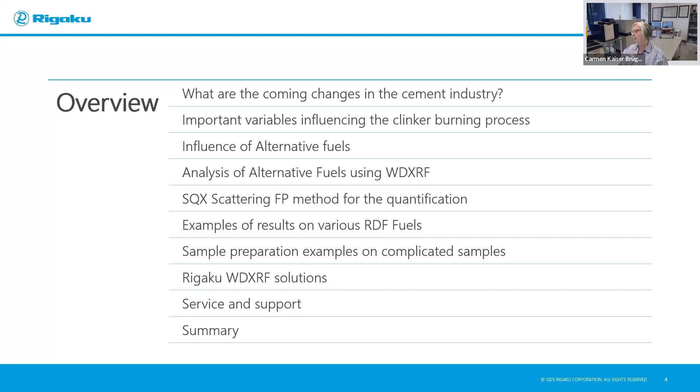So I will show you how to analyze these alternative fuels using wavelength-dispersive X-ray fluorescence. One of the methods we will show is how we can use a scattering FP method for the quantification, because it's complicated materials, a complicated matrix, and very heterogeneous. We will also look at how we can prepare the samples. Then lastly, we will end off with the Rigaku WDXRF solutions and how Rigaku can provide the service and support that's needed. And then we will summarize and conclude with a question and answer session.

Today I'm going to show you very unique XRF applications in the cement industry. Traditionally, an XRF spectrometer is used for quality control of all the raw materials we need to use in the process. As you can see in this diagram, the XRF is really used from mining, crushing, pre-blending, raw meal analysis, kiln feed analysis, clinker analysis for storage, cement grinding, and cement storage, packaging and distribution. So across this whole process we use the XRF spectrometer, but we are going to focus on the burning process - how we can use XRF to measure these alternative fuels.

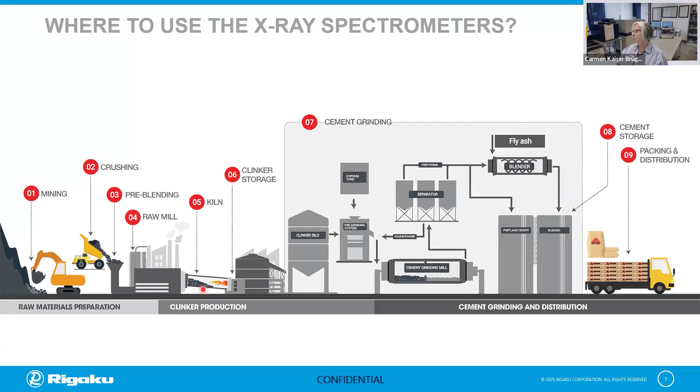So what are basically the coming changes in the cement industry? We need to ensure that we have a stronger requirement for better thermal and energy efficiency. Therefore, we try to use more alternative fuels, and we can increase clinker substitution. Very often there's a shortage of skilled personnel due to a variety of factors, and there's always a huge cost pressure in all parts of the process.

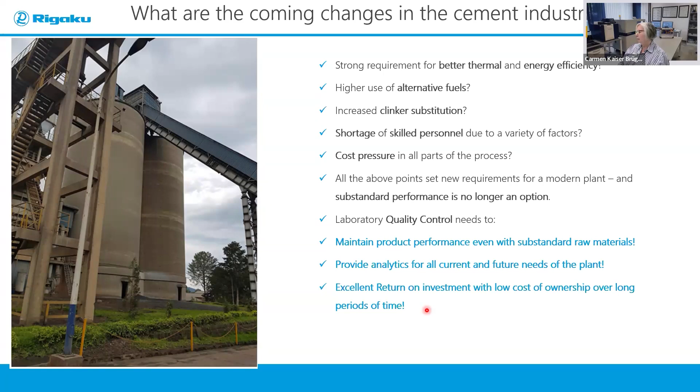All of these points are basically the new requirements that we need in a modern cement plant. Laboratory control needs to maintain performance even when we have difficult materials like alternative fuels. In the past, it was very easy to measure the standard materials, but now it's becoming increasingly difficult. We still need to provide excellent analytical results for the current and future plants. All of this will have an excellent return on investment, and we will have a lower cost of ownership over a very long period of time.

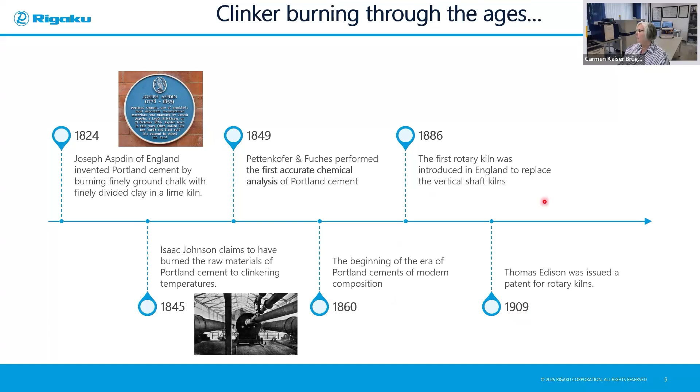In 1849, we did the first accurate chemical analysis of Portland cement by wet chemistry. Then, of course, in the 1860s, we began the era of Portland cement composition. In 1886, the first rotary kiln was produced and introduced in England to replace the vertical shaft. And then in 1909, we issued the patent for the rotary kiln. So it's a very long history of this clinker burning process.

A clinker composition consists of the main elements that we can see here. In the cement world, we call the calcium oxide with a C, the silicon dioxide with an S, the alumina with an A, and the F which is the ferrite. So we need these compositions in the clinker - these are the main elements.

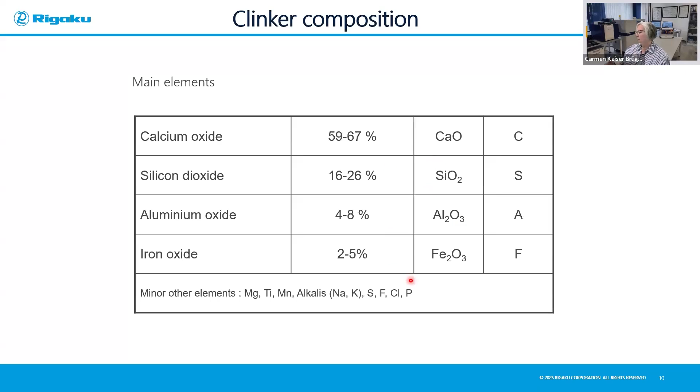If we look at the kiln, the geometry, the speed and the slope will influence this. The preheater and configuration will influence this. And the cooler characteristics will influence this. Of course, the raw materials - the mineralogical composition is important, the particle size distribution is important, the degree of calcination, and of course the thermal history.

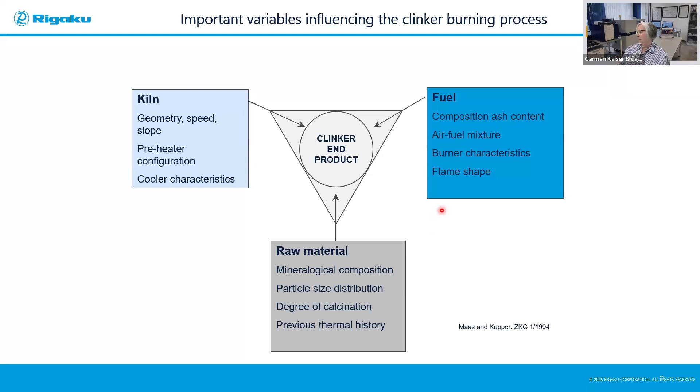So if we look now at the fuel, when we use the fuel in our kiln, as you saw in the process, we will have an ash, and this composition of the ash will add to the clinker. So it's a clinker ash pickup. This will influence the composition, and it will influence these phases that we have. The burning characteristics and the flame shape will also be influenced, and basically the air and fuel mixture will also be influenced.

If we look at the fuel ash, you can see that most kiln systems will almost have all the ash leave as part of the clinker. And the ash composition is very close to the clay because it has a high amount of silica, alumina, and calcium. So when firing low-grade coal, the LSF will have to be increased above 100.

And the coal that we use normally needs to be homogeneous to ensure a constant feed rate and a predictable mineral content. So elements like chlorine, sulfur, and alkali components - alkaline components like sodium and potassium are very important, and they will determine the burning technology. The content of the quartz will have wear and tear on the milling process at the end. So when we have the clinker and we need to mill it, it will have an effect.

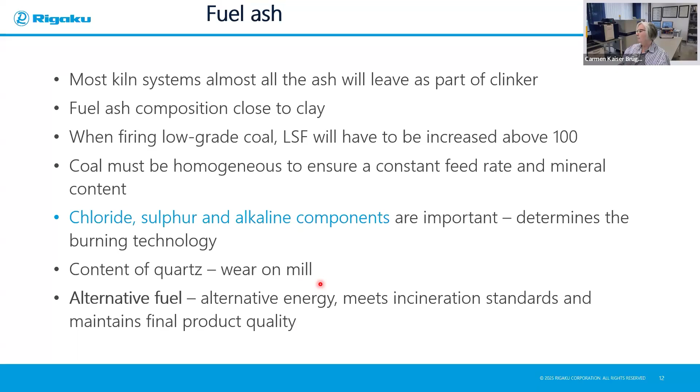So today we want to look at alternative fuels. This alternative energy that we use, other than what we have, which is the coal or the peat that we use, needs to meet the incineration standards used, and it needs to maintain the final product quality.

So if we look at the influence of minor elements - for example, if we have manganese, it can have an effect on the C4AF, which is the brownmillerite. Remember, the C is for calcium, A is for the aluminate, and F is for the ferrite. The titanium will also influence the brownmillerite.

Yes, the P2O5, which naturally occurs in limestone, can be beneficial and more detrimental to strength. Every 1% can decrease the C3S by 10%. So we have to control these minor elements very precisely.

And most importantly, the industrial waste has a lot of influence because heavy elements like vanadium and zinc, which are transition elements, or even lead, which is a heavier element, can influence these phases that we get in the clinker. For example, vanadium can influence the C2S. The vanadium can come from pet coke, for example, or any alternative coals that we use.

If we're burning tires, for example, the tires contain a lot of zinc, and the zinc can influence the C3S content. These will increase the reactivity of the clinker. And lead, of course, is very volatile at 750 degrees and will also influence the reactivity of the clinker.

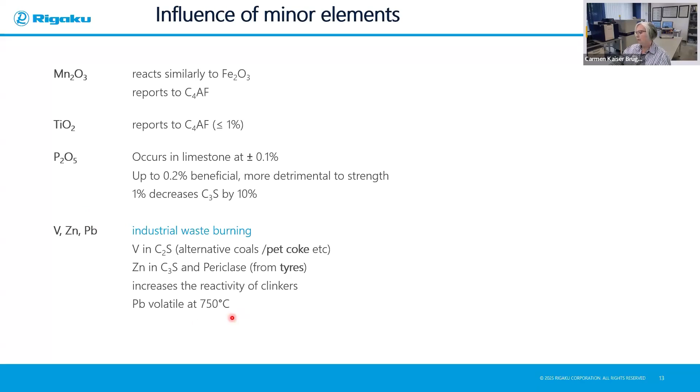So we need to really quantify the analytics of the alternative fuels. If you look at the alternative fuels, here we have a nice example of elephant grass. This has a very high biomass and can yield a lot of energy for the process.

Elephant grass is available in certain parts of the world, for example Rwanda. It's very fast growing and adaptable as a perennial grass, and can be used as a kiln source of combustion. Pyrolysis heats the grass in the absence of oxygen and can produce a bio-oil, a gas, or even a biochar, while direct combustion involves burning the grass directly for heat.

If you look at examples, an alternative fuel like elephant grass, when burned, will convert to ash, and this composition will have an influence. With other alternative fuels, elements like sulfur, chlorine and alkalis will have an influence, and can affect the refractory lining of the kiln, so we have to be careful and investigate this. We also have trace elements that can impact the process, like fan capacity, cement quality, or emissions.

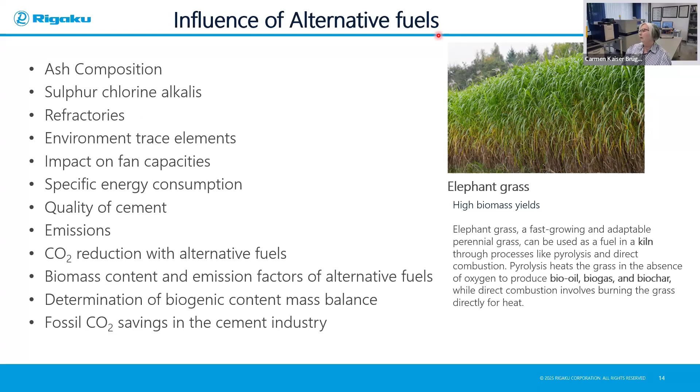The use of alternative fuels can greatly reduce CO2 emissions, so this is an important part. Biomass content and emission factors can influence this greatly. We can mitigate the use of fossil fuels like coal, saving a lot of costs, which has a cost implication.

Here we can see different categories of alternative fuels: liquid alternative fuels or solid alternative fuels. Liquids can be waste oils like solvents, animal fats, sewage and sludges. These are all in liquid form, or even in a suspension with solids. We need to measure these as well, by XRF, which is very easy.

Solid fuels can involve pet cokes, or even tires that can be fed into the process. We can even have animal meal or bone meal, or dried sewage sludges can be used. We can also use medical waste, but this is very tricky in terms of environmental impacts.

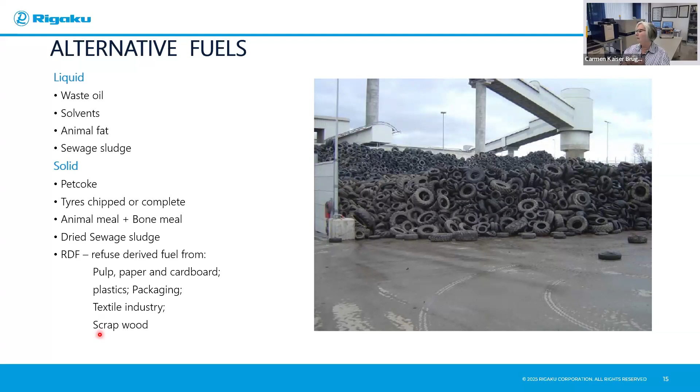If we look at refuse-derived fuels, called RDF, we can have paper and pulp and cardboard, things like plastics and packaging, or even wood, or textiles from industry. So any kind of alternative fuel can be used. This is very beneficial for the environment, because if we use these materials, we basically get rid of this waste in the kiln, which is very good for the environment.

Alternative fuels can be used not only in the cement industry, but also in coal-fired power plants. Tire-derived fuels can be anything from scrap tires or whole tires, and they are always mixed with coal or other fuels to dilute it, like with wood or chemical wastes, and can be fed into the kiln, coal power plants, or even paper mills.

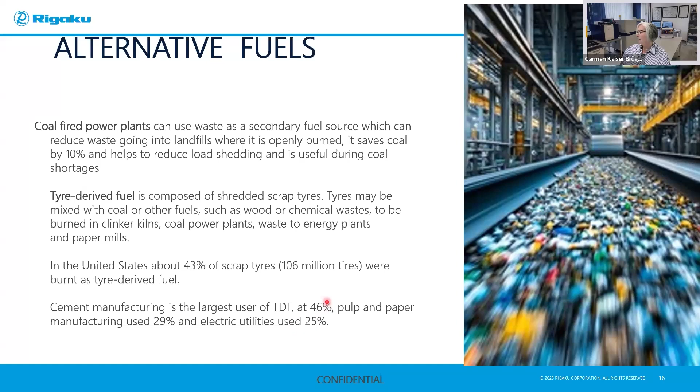In the cement industry, we use tire-derived fuels a lot. Paper and pulp use it around 29%, and electrical utilities use about 25%. So the cement industry is the highest user of tire-derived fuels.

Refuse-derived fuels, for example municipal waste like industrial or commercial waste, consist mainly of components like plastics and paper, recycled plastics, cardboards and wood. These are also used very often in these different industries.

Other materials such as glass and metals need to be removed. For example, if you have tires, you have metals, and they need to be removed. Here you can see on the conveyor it's fed into the process, and this needs to be removed, otherwise it could be detrimental to the kiln. So you remove them and sort them mechanically with special equipment.

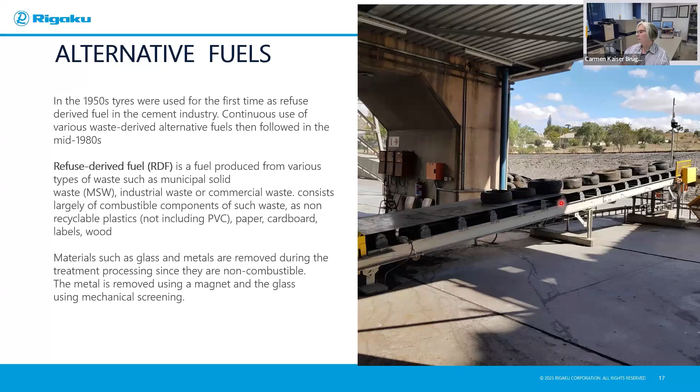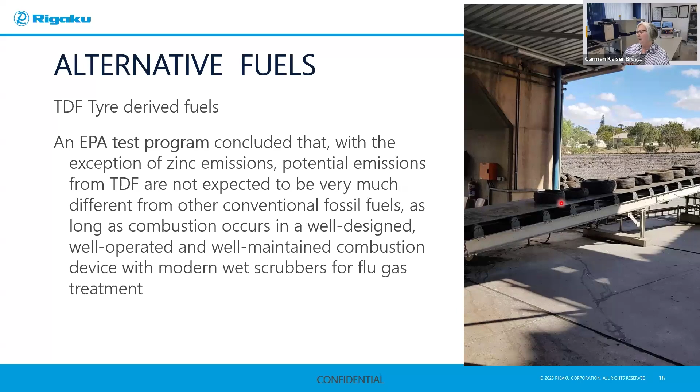So a lot of strategic planning and investigation needs to be done on the materials before they can be used in the process. As you can see, in the cement manufacturing process, our manufacturing process has to be optimized in the proper way for quality control.

We have the control parameters and the analytical solutions. In order to optimize the replacement of fossil fuels with alternative fuels, we need to investigate these materials very closely, and make sure that the alternative fuels do not have an impact on the reactivity of the clinker. So it's our way of driving the raw material and fuel.

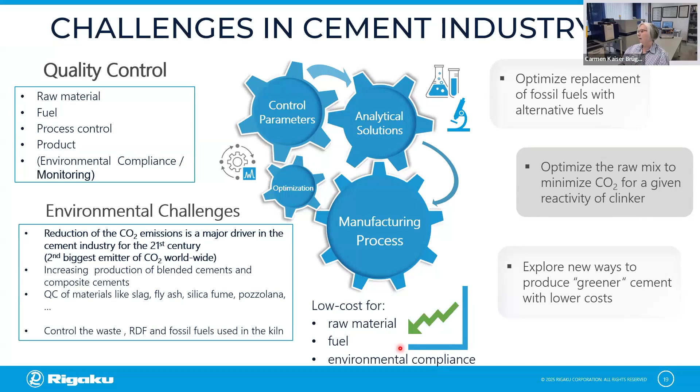The costs need to be driven down so that we have environmental compliance, and in this way we can produce a greener cement with a lower cost. So we need to control the waste and fossil fuels that we use in the kiln to reduce the CO2 emissions, which is the major driver in the cement industry in the 21st century.

So, of course, in order to reduce the clinker factor in cement for the benefit of hydraulic materials, we can use extenders like slag and pozzolana, and we can reduce the input of electrical energy by avoiding grinding the cement to a very low fineness, as required.

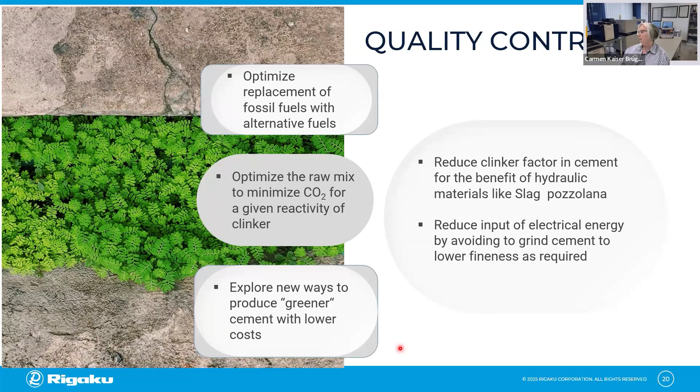So what about the toolbox? Our toolbox needs to involve analytical equipment that can help us investigate these materials. Here you can see we can use XRF, which is a main analytical tool to assure proper composition of our materials. Heavy metals and transition metals, due to alternative fuels, need to be tested, and the materials need to be tested at the correct detection limits. An XRF is an excellent tool for major, minor, and trace element detection.

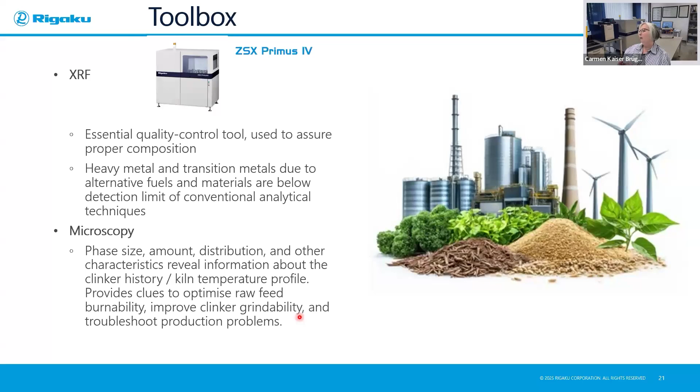Microscopy can be used as well, which is an old technique where we can look at the phase sizes, amount, distribution, and other characteristics that will reveal information about the clinker history and the kiln temperature profile. The clinker analysis done by microscopy will provide information about the raw material and burnability, to improve the clinker grindability, so that we can mitigate any problems that will occur in production.

We also have, for example, X-ray diffraction instruments that can be used for mineralogical composition of the clinker and any unknown materials that may cause problems in the process, like kiln buildups or ring cyclone chokes. These instruments are used very often in the cement industry.

Thermal analysis is a very well-known technique, also very useful because it can quantify organic emissions from the fuel we use and the secondary materials we use in the cement manufacturing process. We can also investigate cement sulfate forms and cement hydration products. These instruments are very useful for problem solving, if you have, for example, kiln buildups, finishing mill problems, or other operational problems.

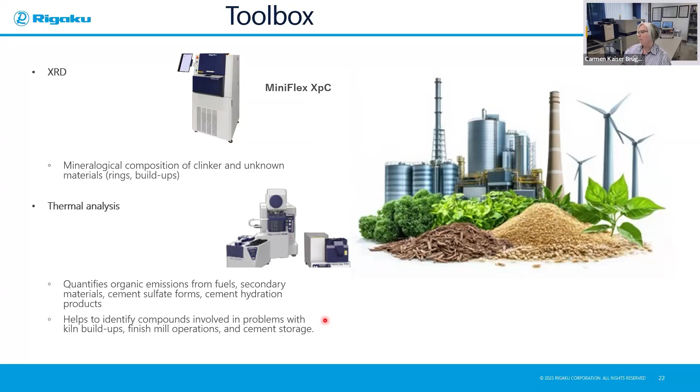So now I will focus on how we can measure alternative fuels using wavelength-dispersive XRF. These are our products at Rigaku, all sequential wavelength-dispersive instruments. We have the Primus series of instruments. We have the Simultix, which is the most powerful system, a simultaneous XRF instrument. And we have the benchtop instrument, the Supermini200.

In all the examples I am going to show you today, I will be using the Primus 4, which is our standard system. I will not talk too much about the instrument now because I want to focus more on the analysis and preparation of the alternative fuels.

But in short, the ZSX Primus 4 is our 4 kilowatt system, and the advantage of this instrument is that we have the X-ray tube above our sample. This is a very nice solution for the cement industry or other industrial customers where they work in very dusty environments and need to measure, for example, pressed powders.

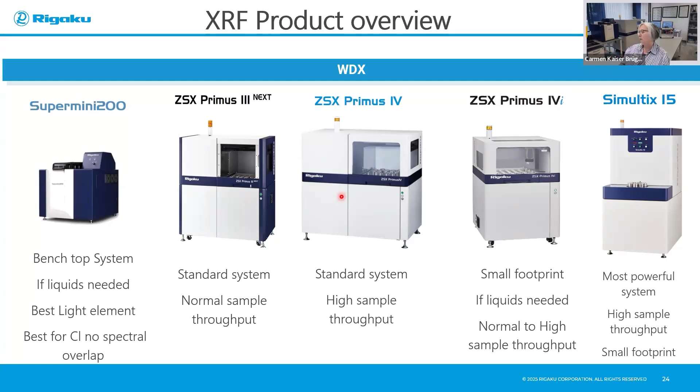which is the main method used for quality control. And of course the advantage of this is that we have the best sensitivity from having the X-ray tube above, very reproducible sample positioning, and most importantly, we do not have any contamination in our chamber due to an inferior sample being measured, maybe a broken pellet, because it will not fall on top of the X-ray tube, which is the most expensive part of your instrument.

So we can measure samples either semi-quantitatively or with a quantification method. The quantification method is very useful if you have calibration standards, and you can measure for quality control this way. But now we are using alternative fuels, and we want to look at the analytical results from alternative fuels, and this becomes very complicated because it's not easy to get analytical standards for the setup of a proper quantitative method. So therefore we use what we call semi-quantitative analysis.

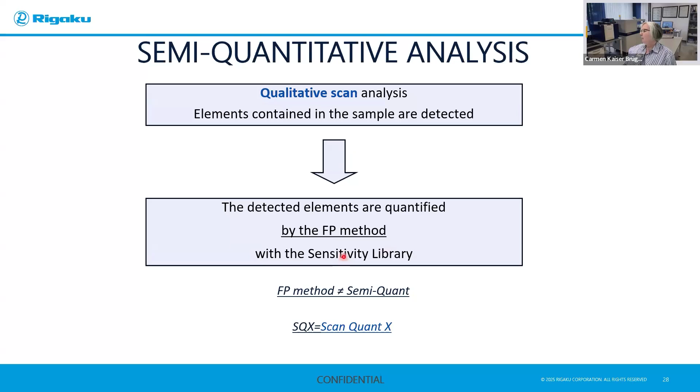Okay, so if we look now at semi-quantitative analysis in the Rigaku software, we call it SQX. Basically this analysis works as follows: we will prepare the sample, get a qualitative scan, and from the qualitative scan and detected elements, we will quantify this using a fundamental parameters method, which has been set up with a sensitivity library from the factory.

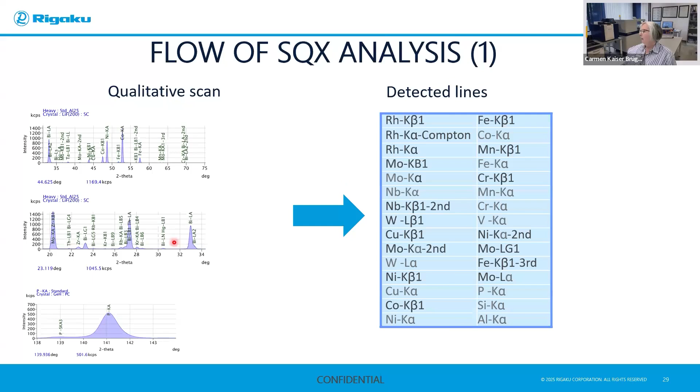So if you look now, this is an example of a semi-quantitative analysis. This is the example of a qualitative scan, and these are the detected lines. You can see we have L lines, we have K lines, we have alpha and beta lines. Once these lines have been identified with a clear peak, which is automatically done by the software, they will be measured for intensity. Each line will be measured with an intensity, and these intensities from the unknown sample will be used, along with the sensitivity library, to calculate using fundamental parameters what the concentrations of the elements will be. The sensitivities we obtain in this library are set up by the factory.

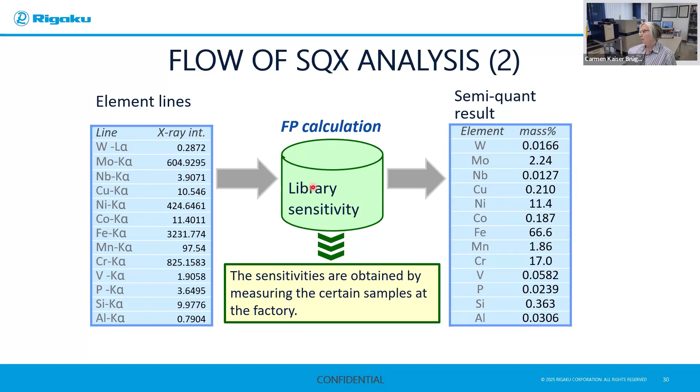Most importantly, I want to show you another method, called the scattering FP method. This is a very useful method in our software to measure alternative fuels. Why? Because alternative fuels are mainly organic. If you look at waste, like refuse-derived fuel, or tires, or municipal waste, or even the elephant grass that I showed you beforehand, these all have a very high organic component. So therefore, we use the scattering FP method.

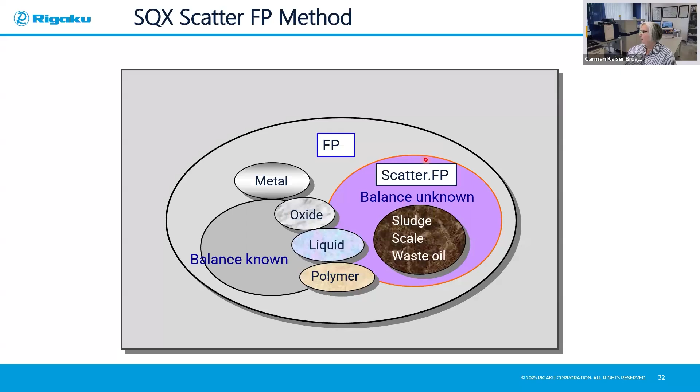So how does it work? This is a pool that you can see of different materials. We have metals and oxides, liquids and polymers, sludges, scales, waste oils. And of course, the semi-quantitative method uses the fundamental parameters method. But if we want to measure these materials, it is easier to use the scattering FP if we have a very high carbon, hydrogen, oxygen, nitrogen component, which is organic. So therefore, we can measure the balance of these materials very successfully using the Compton line. It's called a scattering FP method.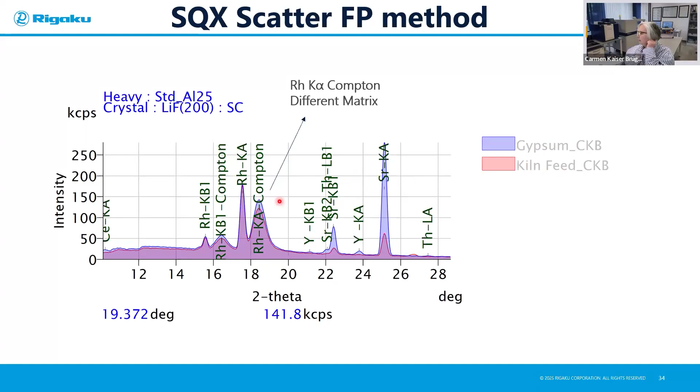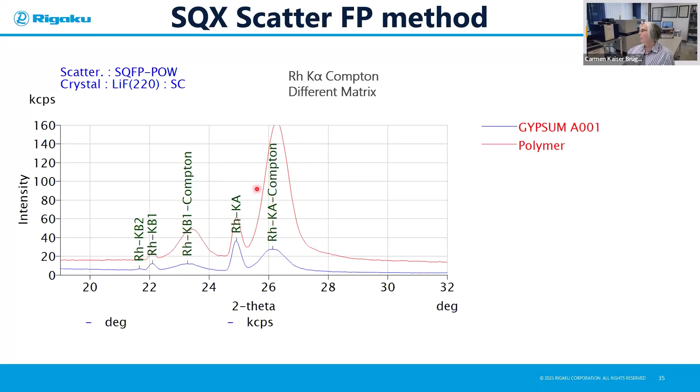Here we have another example where we overlaid the Compton line with a polymer and a gypsum. The polymer has a very, very high organic part of the matrix, so therefore we have a much higher Compton line, more intense. Our scattering FP, as you can see, which is an optional part in the software, is very useful for the analysis of materials like rocks, limestones and plastics, because this will have an influence from the hydrogen, carbon, oxygen, nitrogen portion of the material.

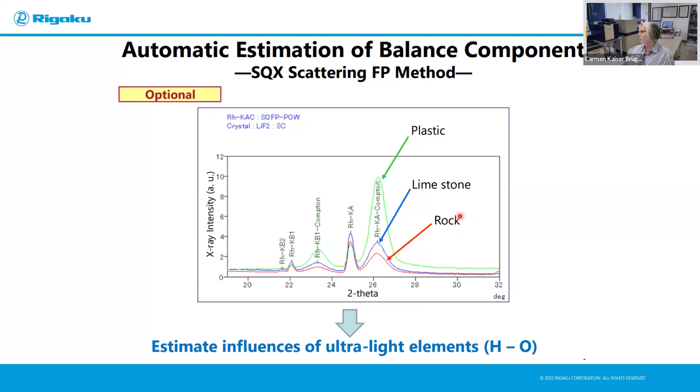So if we look now at the analysis of a tire, this is an example of a tire that's been shredded and cut, and we can see we have a very heterogeneous sample. How do we make the heterogeneous sample into a homogeneous sample? Well, there are different types of equipment available to mill the sample using cryogenic milling, and this is exactly what we've done here. We've shredded this and gone to another step, which involves cryogenic milling. We make the material hard and brittle by treating it with liquid nitrogen, and we are able to produce this kind of sample, which still looks heterogeneous, but is completely pulverized.

Now we can comfortably make what we call a pressed powder from this. Of course, the pressed powder needs to have a defined density, so we need an infinitely thick sample to be able to measure all the elements you see here. In this example, the carbon portion was measured using the fundamental parameters scattering FP method. This means we measured the Compton line to get the balance of the material, which is from a sample A and B. We measured it twice and prepared it twice. You can see there are differences because it's heterogeneous.

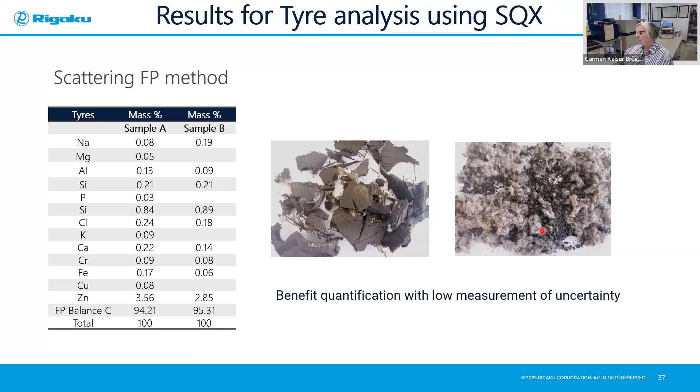How else can we measure alternative fuels? Here you can see a lot of waste. On the plant, we have a process instrument that can shred the material. After shredding, you can see a big pile of waste with different colors.

Sampling is very difficult here for the laboratory, but this is not about sampling - we could do another topic for that. Of course, trying to get a good sample here is a challenge. Once we have obtained a good representative sample from this, we can then make an analysis in the laboratory.

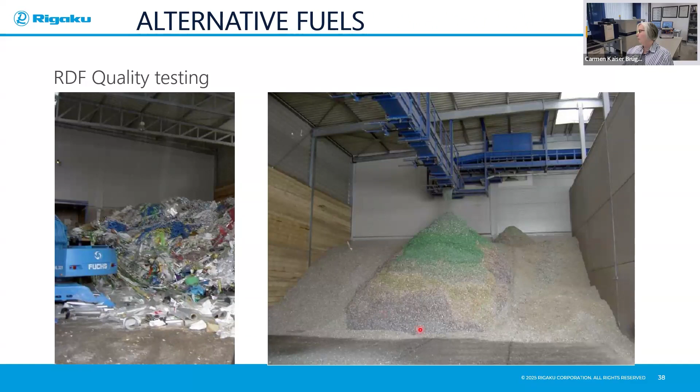From this pile, we took 5 different large samples, because it's a big stockpile. The large samples were treated in the same way as I described before, and we prepared the sample 5 times. As you can see, it's a very heterogeneous sample.

Using the scattering FP method again to estimate the balance of the material, we have defined the balance here. So the more consistent the definition of the balance, the more consistent the analysis of your results will be. This result was done on our smaller instrument, the Super Mini 200 with a palladium source.

The biggest advantage of the Super Mini in this case is the determination of chloride. Why? Because we have a very good peak to background ratio, since we have no spectral overlap from the rhodium tube, which we conventionally get on our bigger floor-standing instrument.

You can see here at the bottom we also determined chlorine, but with a rhodium target. Of course, the drawback is we don't get a really nice peak to background ratio in this spectra that you see. So just highlighting that a Super Mini can also be very useful, especially for the analysis of chlorine.

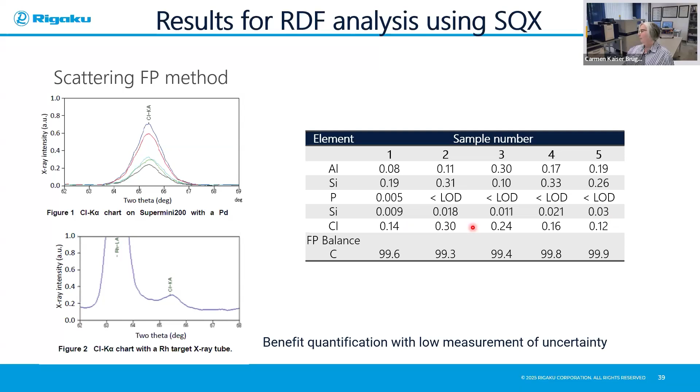Here's another example, but now we have a traditional coal sample. We need to also measure coal, because the coal will be used in conjunction with the alternative fuels. We cannot use just alternative fuels in the kiln - it has to be accompanied with coal.

Coal traditionally can be measured with a fusion method, but in this example I showed you how we can ash the coal by using an ISO standard, as you see here. The ash content can then be measured for the trace elements that we have. This ash needs to be prepared in a certain way, and the ash content needs to also be part of the analysis.

The coal ash that I've given here also uses the scattering FP method. As you can see, we can pick up elements from sodium up to lead. It's important for us to measure the trace elements here as well.

We used the scattering FP method, and combined it with a comparison of just putting carbon as an input. You can see from the results, for example, the reference value is 0.0029% for arsenic. Using the scattering FP, we get 0.0035%, and using and setting carbon as a balance is 0.0017%.

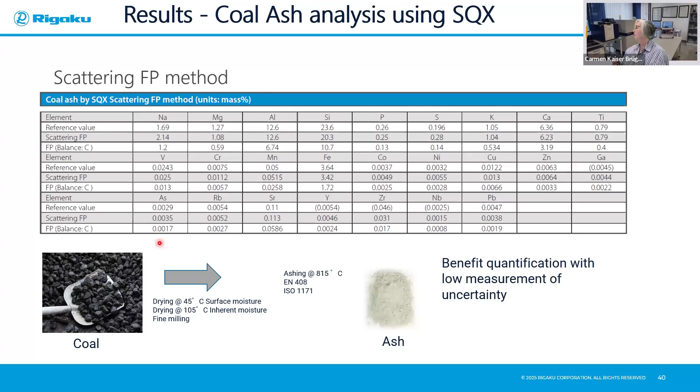So you can see 2 kinds of methods can be used for the analysis of trace elements and, of course, the lighter elements.

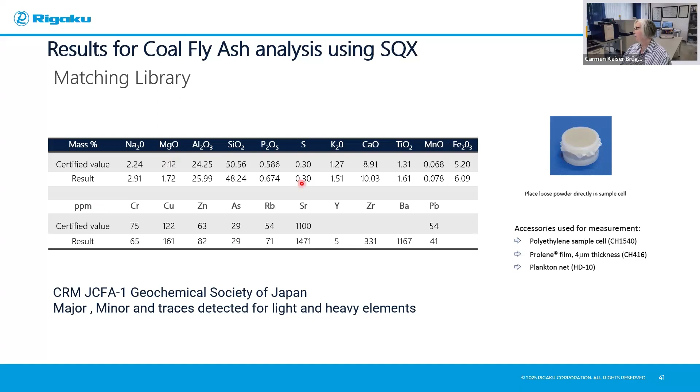So if we set it up as a matching library, then we can measure the sample using the matching library, and these are the results that we can get. You can see the certified values on top for the major and minor elements, and at the bottom, the trace elements in ppm. The actual results obtained are very close to the certified values using the semi-quantitative matching library - very useful.

Okay, here's another example of a refuse-derived fuel using the scattering FP. So you can see, once again, we're using the rhodium K alpha line for the analysis of the balance. So the scattering FP method here yielded a balance of 87.6%, using the rhodium K alpha Compton line.

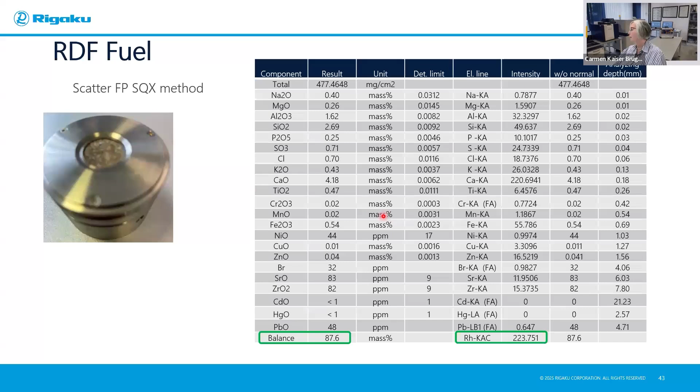So as you can see, the results are expressed here as an oxide. And what's very nice from our software is that we get information about the analyzing depth. So if we're looking, for example, for zinc in the material, it's very important that the zinc we measure has an infinitely thick sample, because heavier elements have a deeper penetration into the sample. So we need a thick enough sample for the analysis. This is why our software is so beneficial for getting correct analytics for our alternative fuels.

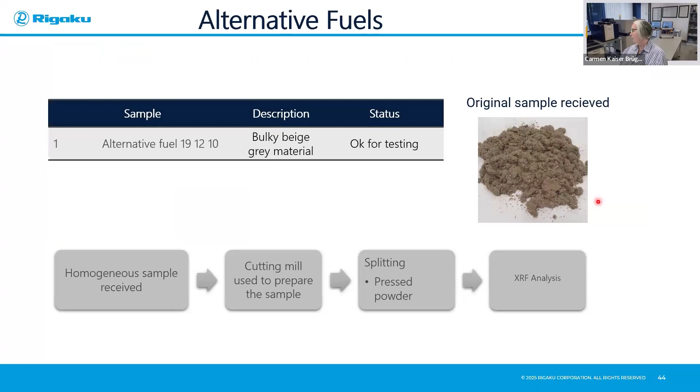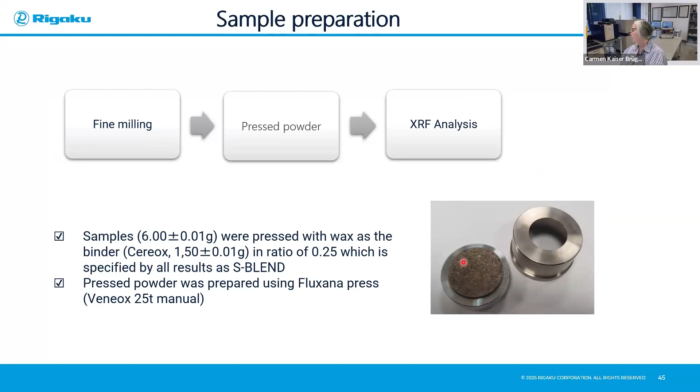Here's the next example, which looked like this after cryogenically milling the sample. After cryogenically milling the sample, we prepared it with a wax to make a nice stable pellet that we can press. And you can see this is what it looks like.

As mentioned, we always need to look at the stability of the measurements, so we can do repeatability measurements here. Just to show you how stable an XRF is - it's all about precision, not about accuracy. So the precision of a result can be shown by basically preparing the sample 20 times and measuring the sample 20 times.

So here you can see a table where we average the results of the 20 measurements using the scattering FP. You can see, for example, we spoke about zinc a lot, so we can look at zinc, and on average we get a value of 0.072% with a very small variation in the repeatability measurements. This shows that XRF is a very reproducible method and has a very small deviation in the results. So once again, showing the precision of the result.

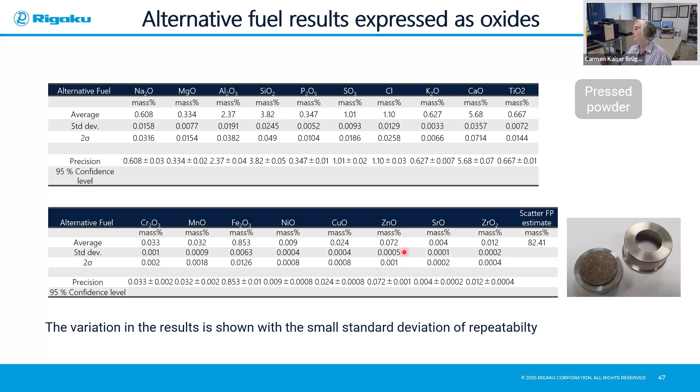Okay, so here I want to talk a little bit and show you how you can prepare this kind of sample. So here you can see an example of waste, like municipal waste. Many industries, even the petrochemical industries, can extract oils from here, and they also need to measure these samples - not only in other industries, but here, for example, you can see a lot of different colors and a heterogeneous sample. So, of course, the first thing we need to do is dry the material at the correct temperature.

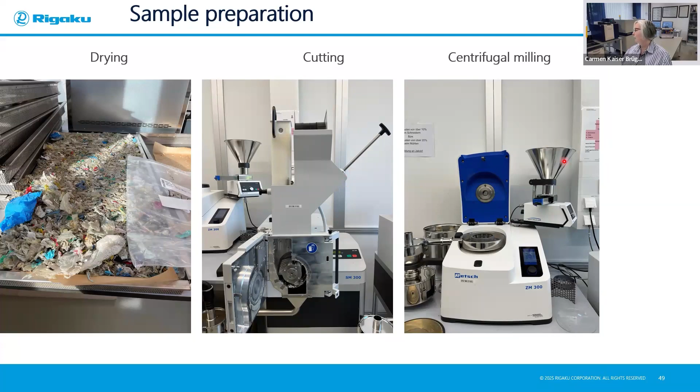Then this dried material can be passed through a cutting mill that you can see here. After it's been shredded and cut, we can split the material and then undergo what we call centrifugal milling, so that we end up with something, a bag that looks like this. Of course, it still looks very heterogeneous, but we've tried to make it as homogeneous as possible by undergoing the different steps in the preparation.

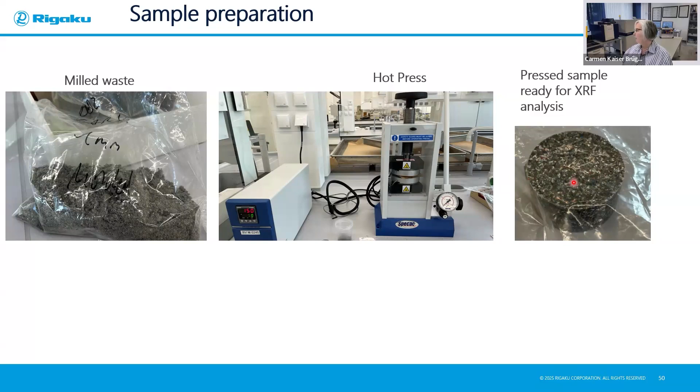The heating plate will also ensure that we get a very smooth analytical surface. So if we would like to measure sodium in this particular sample, it would be very easy, because we'll have no imperfections in this analytical surface.

So, of course, the analysis of that material you saw now is shown here. This analysis is slightly different in that we measured carbon and hydrogen by another technique, and we put these values as a fixed input into the analysis of the semiquant. So as you can see, this would be the analytical results for that kind of hot pressed plastic.

We need to look at not only the analytical result, but the detection limits that we get. We need to observe and refine the spectra, and always make sure we have the correct analyzing depth. Please take note, the heavier elements always have a larger analyzing depth, so it's important that we have this very thick pellet for the analysis of these heavier elements.

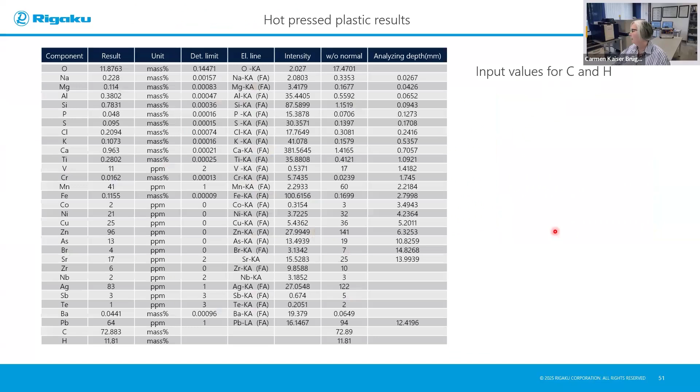Let's talk about some of these international norms. If we look at the ISO 29581 for fusion, we have many fused bead standards available to set up these calibration methods. One of them is the pre-calibration package we can offer, which at Rigaku we call an oxide fused bead pack. It's a very wide calibration range, as you can see here.

But it's not good enough for the analysis of cement. So we have other solutions, because the cement needs a narrower range, not such a wide range.

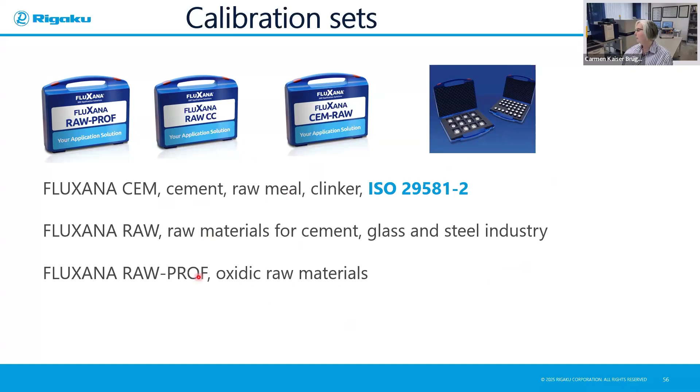More dedicated and specific calibration sets would involve, for example, the ISO 29581, which is a narrow calibration range for the cement, raw meal, and clinker. The other is the raw, for the cement, glass, and steel industries. Then there's the raw professional, a much wider range, covering oxidic raw materials. If you are interested, please contact us for more details on the solutions we can provide.

If we look at the pressed powder method, we also offer at Rigaku what we call the cement pressed powder calibration method, which is also a pre-calibration method. This is the example of the analytical range and accuracy achieved, from silica all the way up to the element chlorine. But please note, because of matrix matching, it would be ideal for you to add additional standards onto this calibration to extend it for matrix matching.

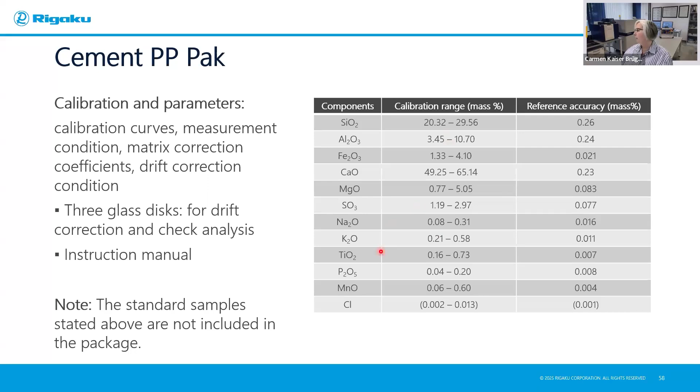At least 95% of your results should represent the matrix that you have, because pressed powder has the drawback that we need matrix matching standards. Other examples of pressed powder calibration sets, not only cement, include slags, clays, limestones, dolomites, sand, gypsum, and bauxite. So I have shown you pressed powder and fusion calibration standards that are available.

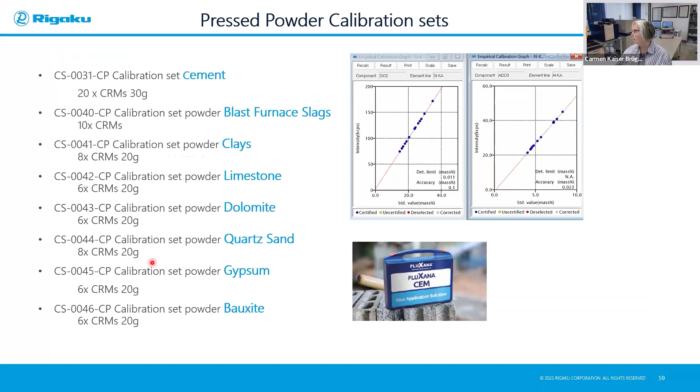But we can also help you with doing matrix matching calibration. If you buy a new spectrometer from us, we will work together with you to certify your reference materials, and these references are called secondary standards. For pressed powder, this is very important, and therefore we can do this for you.

The importance of secondary standards is that we have an in-house certification based on the international reference method. And of course, if you have matrix matched calibrations, your accuracy and precision of your raw materials will be very good with the pressed powder method.

Here we have an example of a limestone. If the limestone quarry has different grades of limestone, we can certify the different grades to make a good calibration range. Another advantage of the XRF software at Rigaku is we can not only create an empirical calibration, but also a fundamental parameters calibration. Please contact us for more information about this.

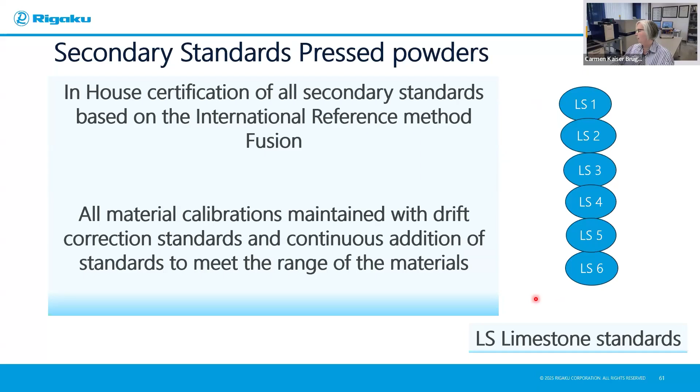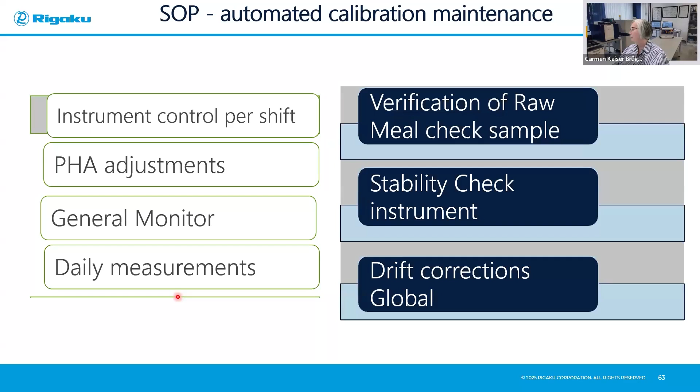It's important with your spectrometer to also have a standard operating practice for calibration maintenance. We can do this for you, and we can set this up automatically with check samples and drift corrections. Drift corrections could be done as global drift corrections or individual drift corrections.

The integration of our analytical results can be transferred to LIMS, to any external data transfer like QCX, Blend Expert, PrepMaster, Polab, and most importantly in the cement industry or any industrial customer, we can define the user access levels to protect the calibration methods that have been defined and so on.

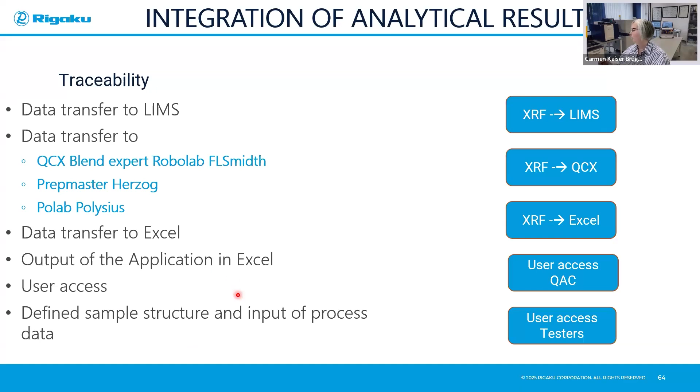In terms of service and support, we have a help desk at Rigaku Europe, and we also offer extensive European dedicated technical and application support. You can see some examples here. We're very flexible with the service contracts for your requirements.

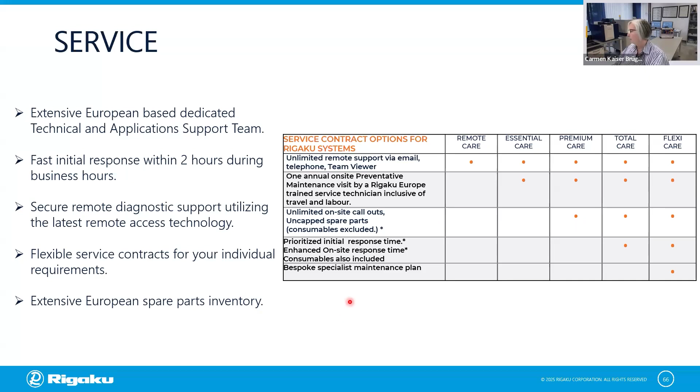Why should we have an XRF and why Rigaku? It's very important in any industrial process to have an instrument that's norm compliant, so of course all our instruments are norm compliant. It's a very cost efficient analytical instrument, and it's very easy for non-experts, so you don't need to be an XRF expert to use the software.

Even if we have alternative fuels, we can comfortably measure very difficult matrices and samples, not only with calibration methods, but also our very powerful fundamental parameters, SQX methods. Very reproducible analytical results can be obtained from an XRF.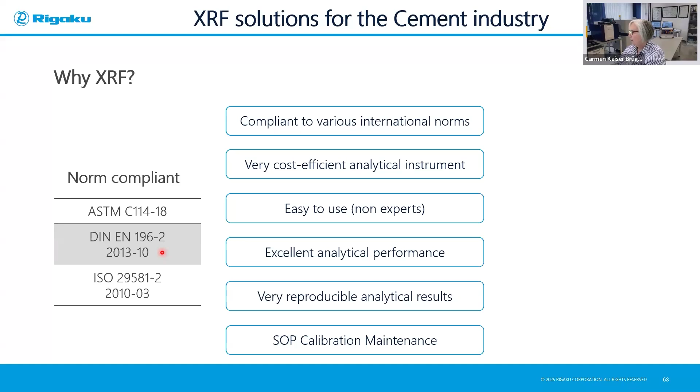So why the Rigaku XRF? We didn't tell you too much about Rigaku, but Rigaku is a global leader today in X-ray technology, and we were established in 1952. We have a full product range from WDXRF and energy dispersive XRFs to even online XRFs. Because we are a Japanese company, we permanently are developing our products, so we have the Kaizen philosophy. We are very proud of our XRF equipment because they are very rugged and reliable industrial units.

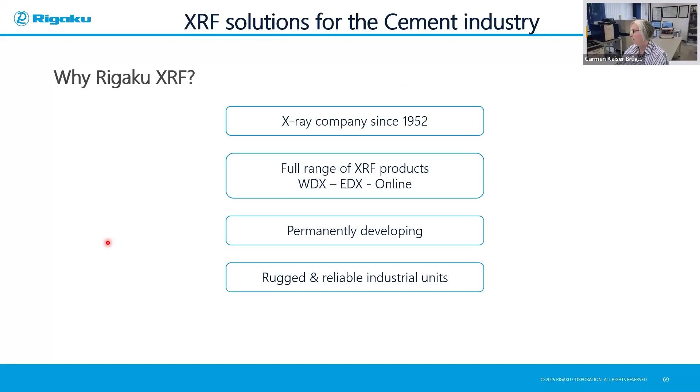The last thing that I wanted to show you and share with you is the sum of the unique advantages of a ZSX Primus 4. As I mentioned, one of the best features here is the X-ray tube being above the sample. This minimizes the risk of any breaking pellets on top of your X-ray tube.

This kind of instrument will be a very robust instrument because the X-ray intensities will not change rapidly due to the X-ray tube above. It also has the best sensitivity for light element analysis because of automatic pressure control and having the X-ray tube above. And most importantly, the very reproducible positioning of the sample for the analysis.

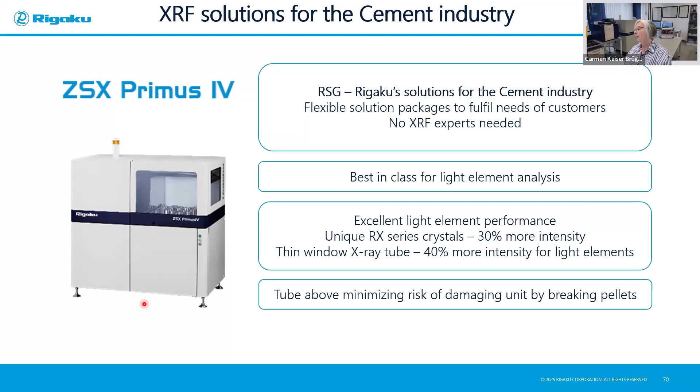We also have unique crystals like the RX crystals, which are Rigaku crystals, and they offer a lot of intensity for some elements because they have been designed for the analysis and separation and resolution of specific elements. Lastly, the very thin beryllium window, which is very thin in comparison to others, will offer you at least 40% more intensity for very difficult elements like light elements with low fluorescent yield, such as fluorine, sodium, and even boron, if you would like to measure this.